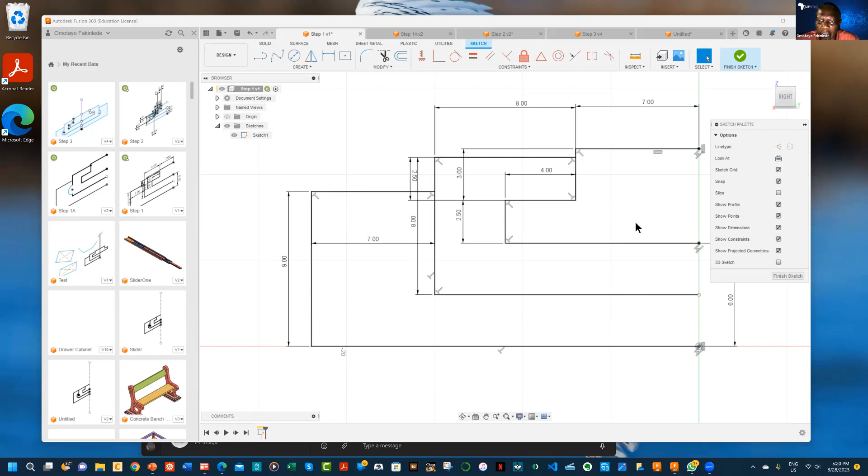This is the drawing we have from before we went on break. We have these lines here, 1, 2, 3. And then these are the 4 half sections of the 3 slides that we have.

Now, we could go on and extrude this, but it means that we have 0 tolerance between the sliding bodies, which is not practically possible. If you are going to manufacture it, they won't slide. So you have to input an amount of tolerance.

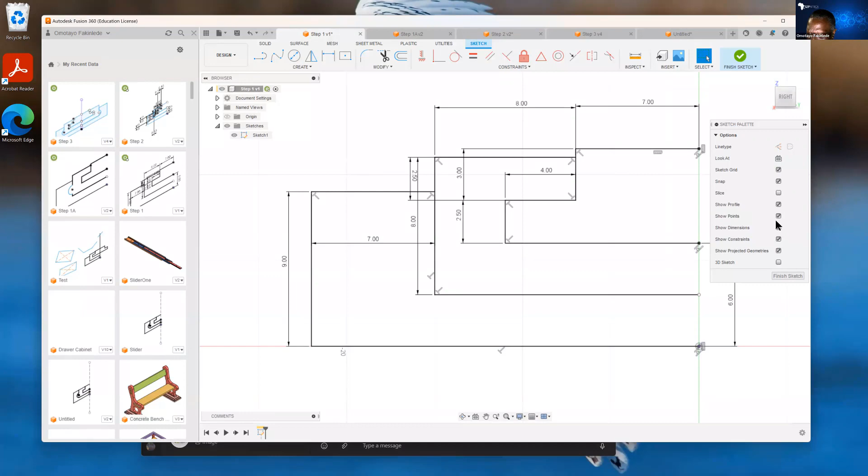To do that, what we are going to do, let me take the dimensions and the constraints off from being shown. I can do that by removing the constraints, and I'm only removing them from being shown. The dimensions are still there, but they are not explicitly seen. Okay, so this is the drawing we have.

What I'm trying to explain here is that between this middle slide and this inner slide, there should be some constraints, there should be some tolerance. Let us say a tolerance of about 0.1 of a millimeter. You can, but practice will make perfect. You will be able to see whether you should make it bigger or smaller as you actually make real objects, either by 3D printing or by actual manufacturing.

The thing to do here is to do what is called an offset. We can begin by offsetting this drawing through a distance of 0.1 of a millimeter. To do that, you go to the modify section and you choose offset, and it says select curves. This is the curve you want to offset, and the offset position is minus 0.1 of a millimeter, and that is it here.

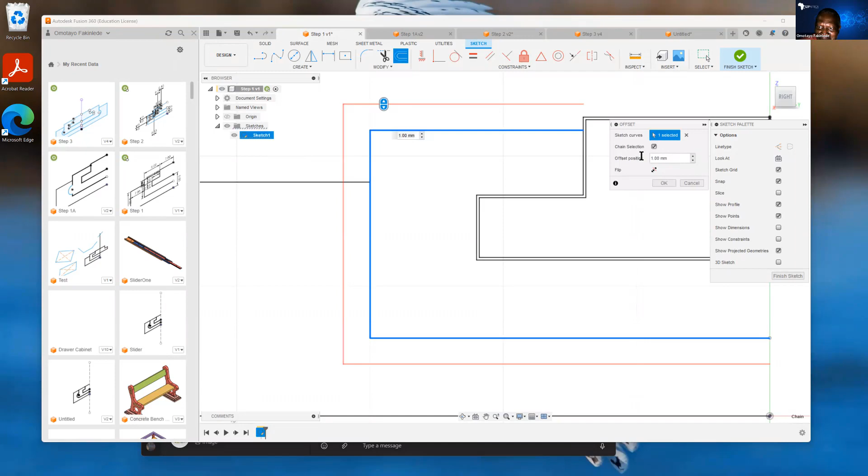So you can see, let me make it bigger so you can see what it has done. It has created the tolerance by duplicating that line. We're going to remove some of one of the lines as we go on, but at least that is something you can see here. And then if we want to do the offset again, we can talk about this one, and we can create this offset again by minus 0.1 millimeters.

If we do that, the next thing to do is to do a cutting. If we cut some of the unnecessary lines, for instance, the top part of this one is not necessary, the bottom one is enough. So I can cut this one off. I can cut this one. I can cut this one off too. So that is the cut.

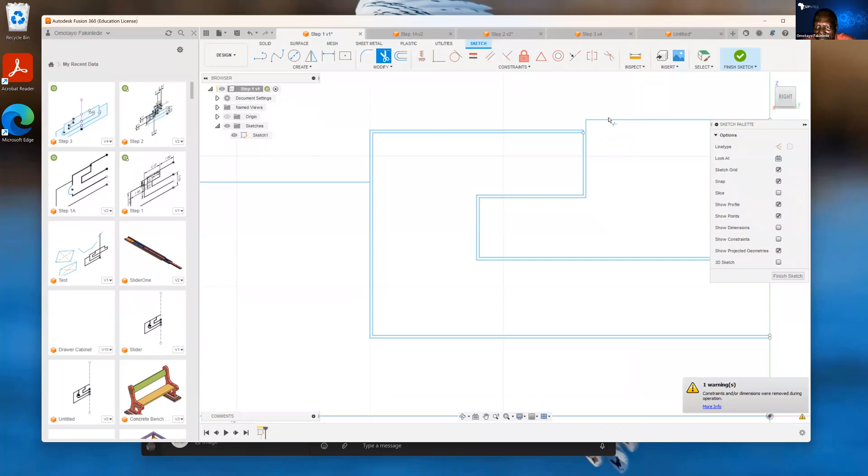I've done that cutting. And inside in the larger one, I can cut this one also off here. I can cut the top one here off. And then cut it off to this point here. So if you look carefully now, you will see that the inner one is a complete closed curve, but that complete closed curve is not touching the one that is next to it.

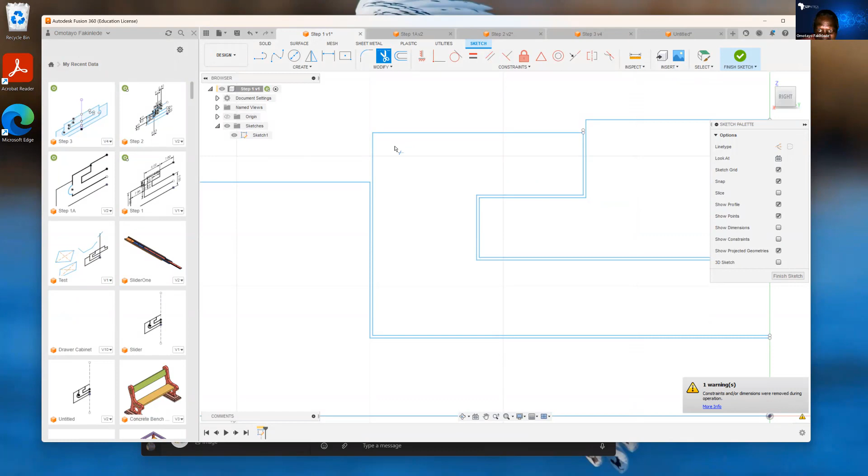Similarly, let me see whether there's a problem here. There's still a small problem here. There's a place to cut off here. So I'm cutting this one off. So if we look at it now, you will see that it is still the same drawing, but there's a slight offset between the inner and the middle slide here with a tolerance. And then similarly, the middle to the outer one, there's also a tolerance. So there is nothing touching the other.

If we do that, the next thing we're going to do is to start filleting. Filleting is to make a gentle curve instead of the sharp edges that you see in some of these joints, at these corners. And you have, to fillet, you have this filleting icon here.

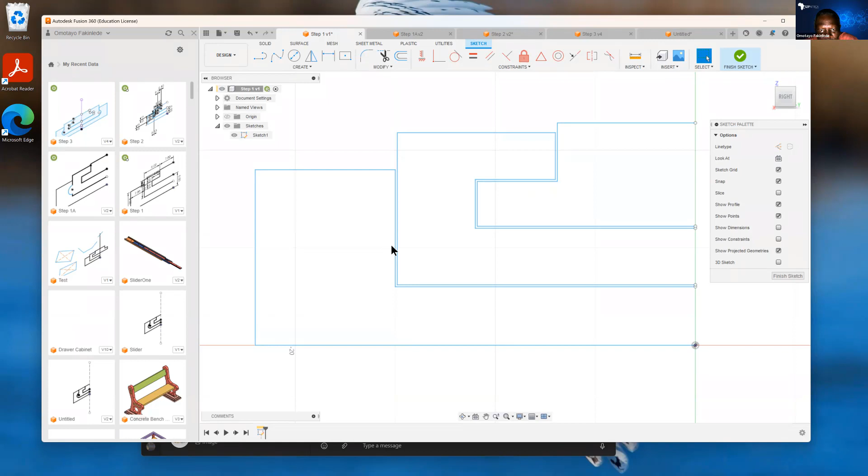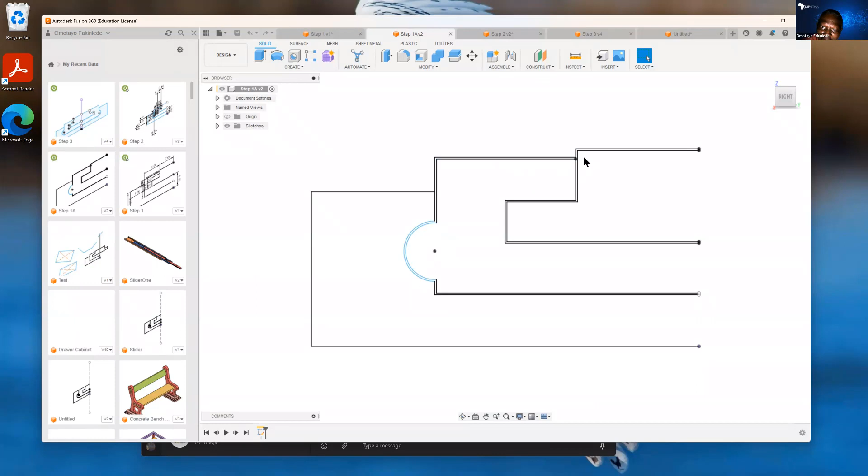So if you choose fillet there, oh sorry, before I fillet, I need to do a circle here. If I do a circle here, and I can do a circle here, that circle is supposed to create the groove. And I'm supposed to have done that circle before the offsetting. So instead of going over that, I will just show you where I've done it correctly. So if I did the circle before the offsetting, this is what I will have. I'll have a situation where the circle here is also offset with the thing, and there's a groove here.

If I do everything correctly, then I have this next drawing here. The only other thing here is that we have done the filleting around these edges. I will take an earlier curve to show you how the filleting is done. Even though that one doesn't have this offset, it will explain the filleting method.

To do the filleting here, you just take the fillet icon, click it, and then choose the two lines to fillet at the angle. If you're happy with that, it says 1.5 millimeters and 0.5 millimeters. I think that is good enough.

So if you're happy with that, take the marking menu, right click, and it says repeat fillet. You take repeat fillet and do the fillet here again, this one and this one, the same fillet. You accept that, and do another fillet for this outer one.

Okay, first use the marking menu and then fillet here and here. So that is that. There's an error in this fillet here.

Let me go back two steps to remove that error. Okay, so let me do the fillet again. Marking menu, repeat fillet, that is here. If I do the repeat fillet here too, then we can do another fillet here and a fillet here. All those fillets are the same.

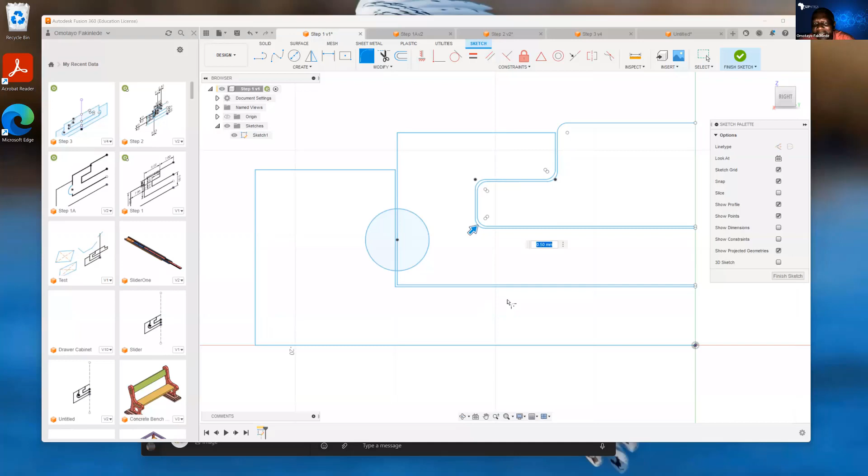So that's why, if you forget or have any difficulty, you can right click and get the marking menu, which says repeat fillet from this to this. So you can do the fillet with offsetting the circle.

By the time you finish all of that, you arrive at this drawing. This drawing here is the same drawing as before. We have done two or three enhancements. The first enhancement is that we did a groove here using a notch or a groove with the circle.

All we did is take a circle, center circle, click it here, and just select the radius. The circle with the radius gives you the circle. Then if you do the filleting here and there, everything where they are touching is smooth going. We have basically finished the drawing now.

We are now ready to do the next step before we begin to extrude, which is to create a mirror. Remember that from the beginning, what we were working with was half the drawing. Now that we've completed our work on this, we can get the whole drawing by creating a mirror image of what we have there.

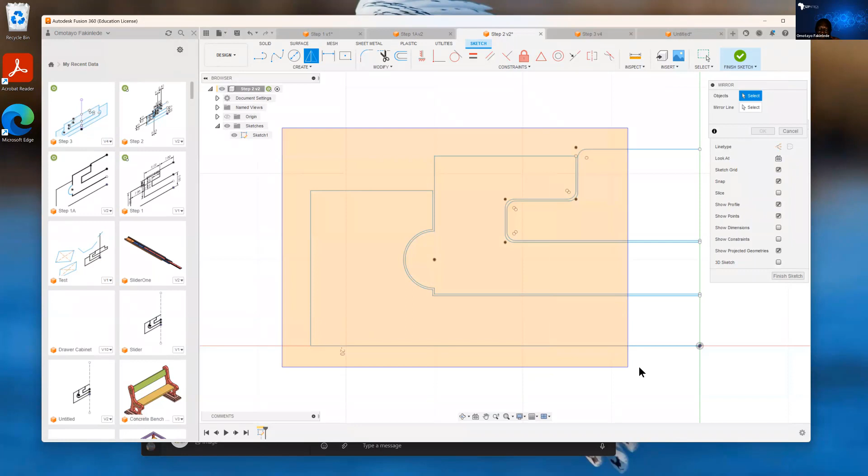There are several ways to do this, but one easy way is to just use a fence. If you start with a fence that carries all the things you have done before, it selects everything that is there. It says 74 elements selected. You may wonder, did you do up to 74 elements? Well, all your lines, fillets, and constraints add up to 74.

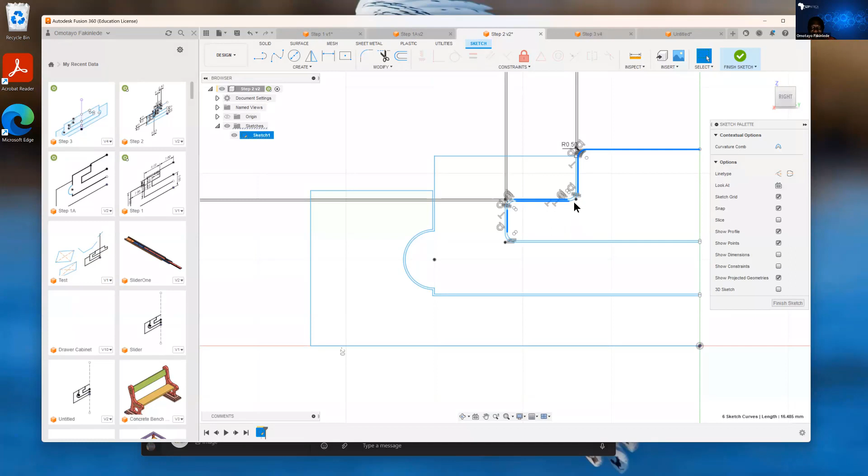You could also pick them one by one. For instance, if I take that off, I can pick this line, then this line, then this line. Maybe I should hold down my shift key. I can pick them one by one, but it's not as efficient as picking them using the fence.

So let me take that off and go back to the mirror dialog. It says select objects to be mirrored. So I take a fence and select all the objects I want to mirror, 74 of them. Then I click the next dialog, which is the mirror line.

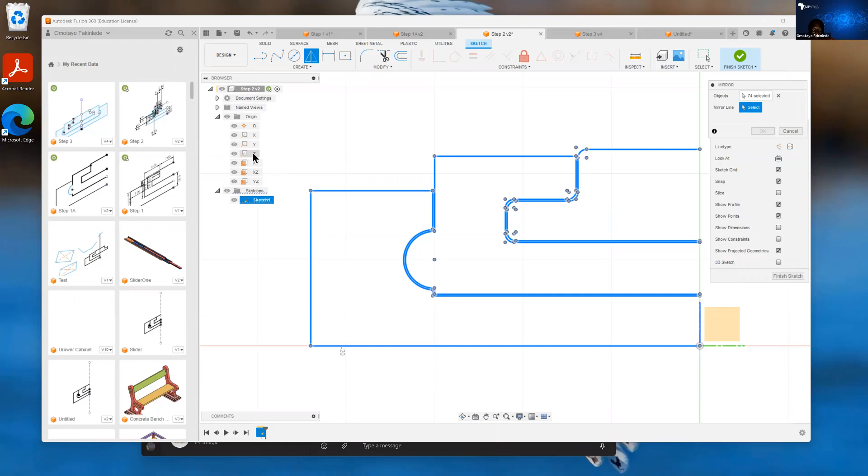There is no line horizontal here where I want to mirror it. I have two choices: I can either draw a line here to use for mirroring, or go back to the browser. If I go back to the browser and make the origin active, I can choose the Z-axis as my mirror line. So if I choose the Z-axis, you see the mirror line has been selected.

So you see what has happened now. With the mirror line selected, I can press OK. When I press OK, the entire object has been fully mirrored. So let us see the whole thing in full.

So let me take this sketch palette off so you can see the whole thing. Even though we worked only on one side, the mirroring has created the full picture on both sides, so we have a mirror image now. This is the section for the inner slide, the middle slide, and the outer slide.

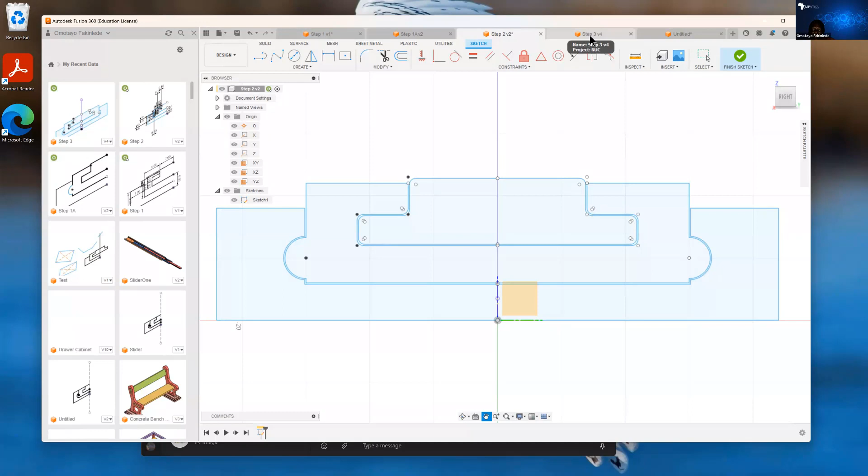We can do many things now from here. Let's see, I can put it in plan view, and then create solid objects. Before we do what we really want, let's say we want to create solids of revolution from here. Let me create solids of revolution and see what it looks like.

I say create, finish sketch, and now I want to create a revolve. It asks me to choose the profile to revolve. If I choose this profile, the next thing is to choose the axis of revolution. Again, the Z-axis is the axis of revolution, so let me go there and choose the axis.

Immediately you can see the revolved cross-section of the inner one. Let's say I create a component from that - I create a new component, and that's a component there. I can come back again, turn on the sketch, and create another revolve.

I create another revolve. Let's say I create the revolve based on a profile - this is a profile. Then I want to create a new component, and select the axis of revolution, which is Z.

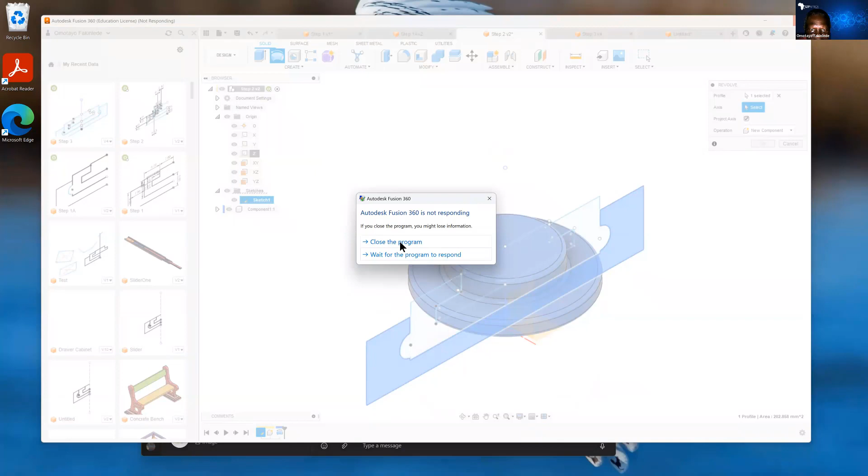Okay, the Fusion 360 is not responding. Yeah, I don't know why. My Fusion 360 seems to have frozen here. That's okay, it's come back.

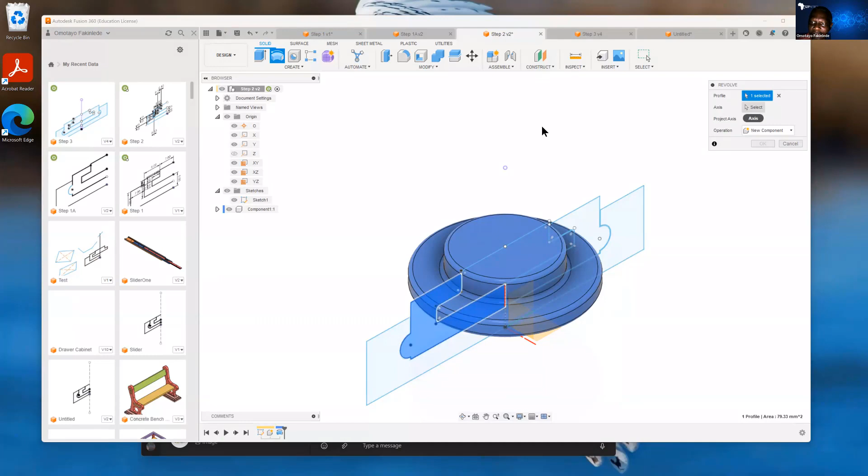Okay, let me do another one. If I create a revolve, let me select another object here. If I create a revolve on this, remove this one, and select the axis of revolution, which is the Z-axis, it has done this revolve around that as a new component. So that's another component, and now you may not see that tooth because this one is almost completely covering it.

Let me create the third object and see if we can. Let me try the third revolve now - create revolve, select the profile, the axis, and the angle. I want the angle to be 180, and I want a new component.

Let's see. It's okay, it's not... this is not, it's not - it's complaining there's an error. So let us take this back.

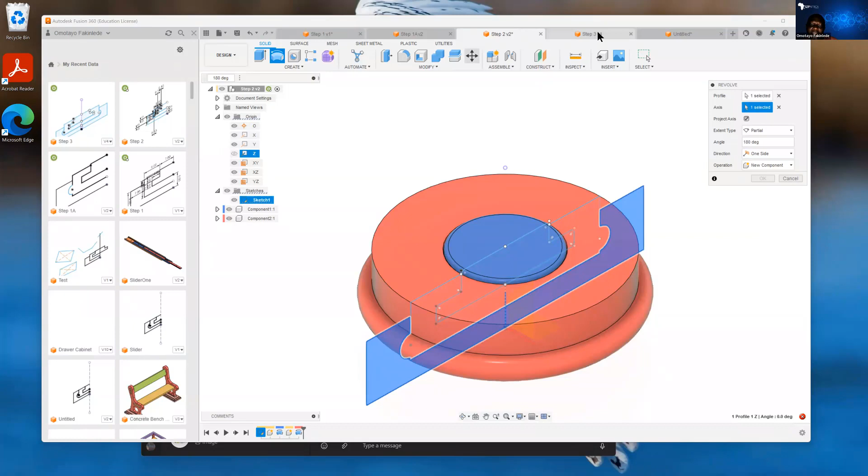Instead, you can see that we can create revolutions from it, but that's not what we're interested in. We wanted to extrude - let's say we extrude this.

Let me take this one that was difficult to revolve, and create an extrusion instead. I select the profile, and I want the extrusion to start on the profile plane. This is the extrude dialog, and I want it to be symmetrical to both sides, so it moves on both sides, and I want to create a component with it.

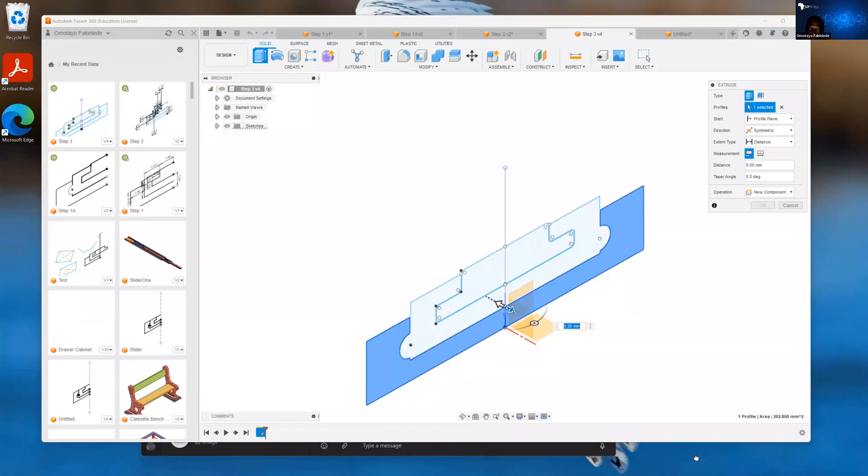Let's say I make it 200 mm - no, let's say 150 mm. That is it. So that's the outer, the outermost part, and it now exists as a component.

If I want to look at the sketch again, I open it and create another extrusion. This time let me choose the inner section, and I want it extruded on both sides symmetrically, with a distance of 150 millimeters. You can see the second part, and I want it to be a new component.

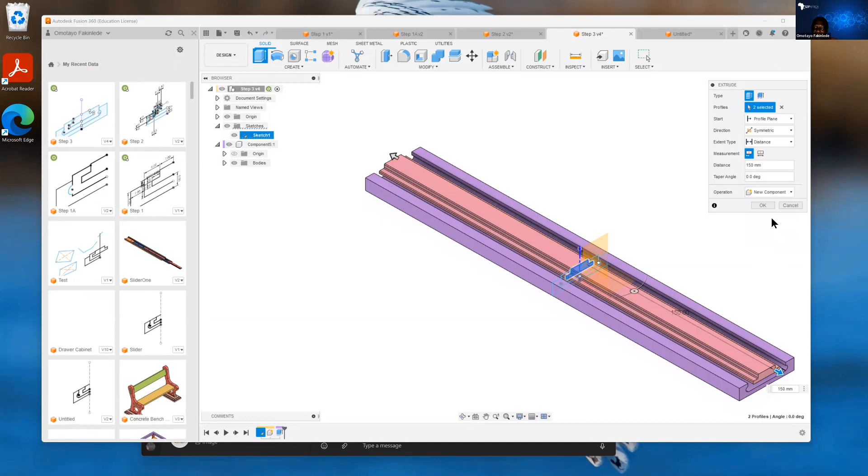Okay, let's take a look. I have created two extrusions. I've created the innermost and the outermost, leaving out the middle one. So this is it now. Let me now create the middle one.

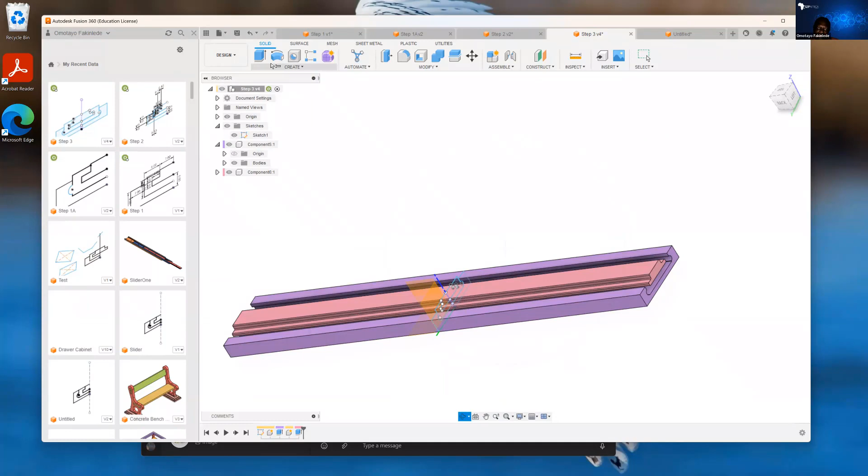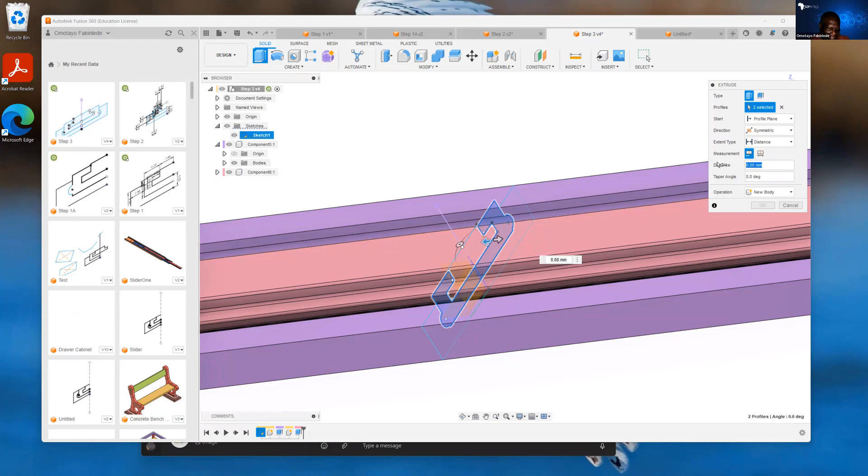I can create the middle one by extruding again. Let me choose the middle part, this middle part, and create my extrusion. I want it to be symmetrical again, as before, and make it 150 millimeters on both sides. So you see, okay, not new body, but new component.

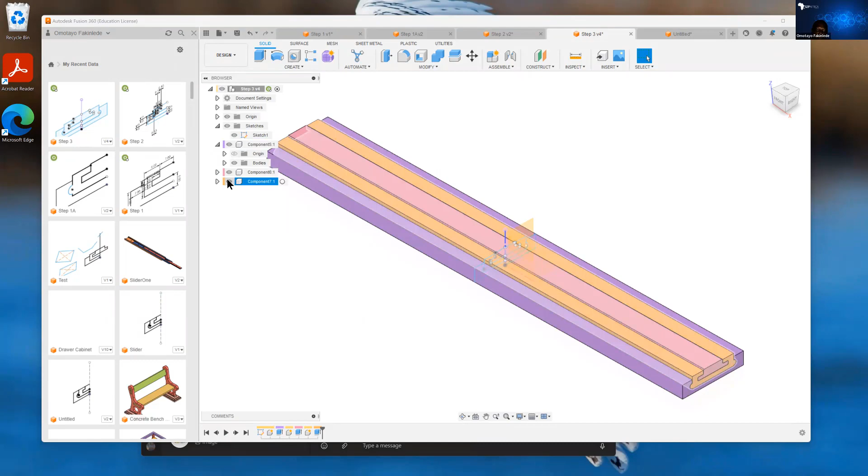So let's go home. You can see the three parts of the base slider have been created. You are able to switch off components so you have only one showing. So if you want to see the outermost component alone, that's it. If you want to see the innermost alone, that's it. If you want to see the middle component alone, with its groove and everything, that's it. So all these things are just coming from the simple drawing we have.

Let us see how much time we have left and see what we can still do. I want to go back to the slides now and discuss. If you have questions, please don't hesitate. If there are things that confuse you that you want me to go over, let me know by asking a question in the chat room. So let us go back to the slides.

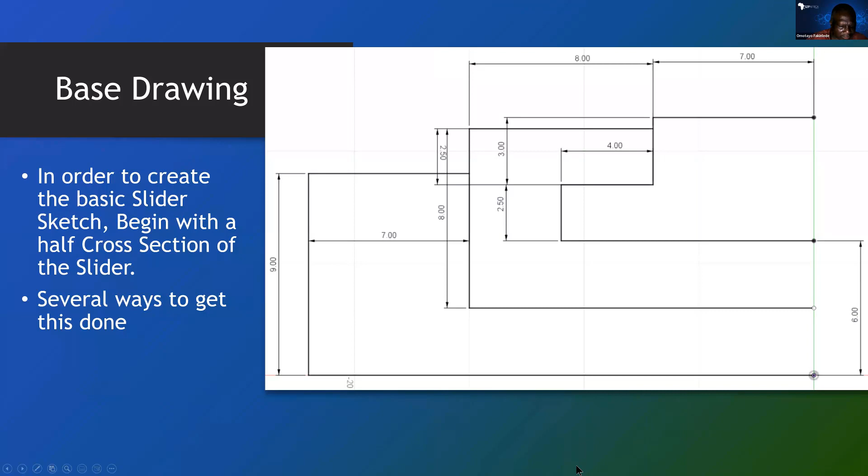There is a question from Olarinde Ali: when you want to revolve a component, how do you choose the axis of rotation? How do you choose an axis of revolution when you want to revolve? If that is the case, I want to go back because of Olarinde Ali's question, and let us do the revolve again. To do revolve, let me go back to the Fusion 360 page.

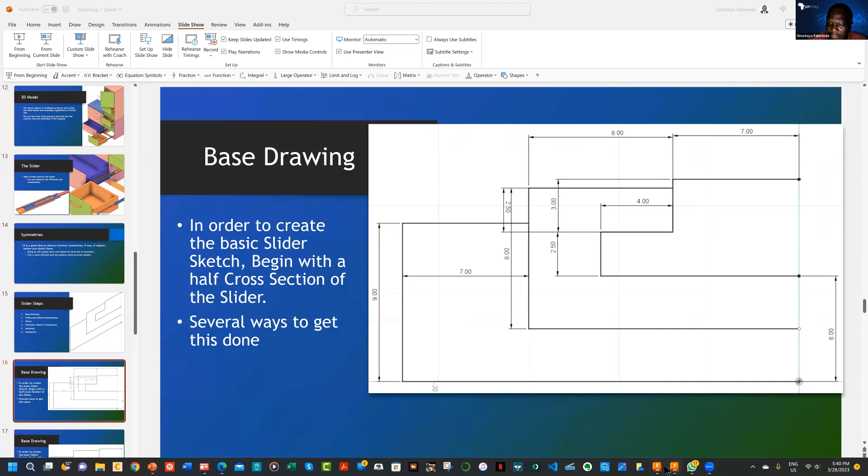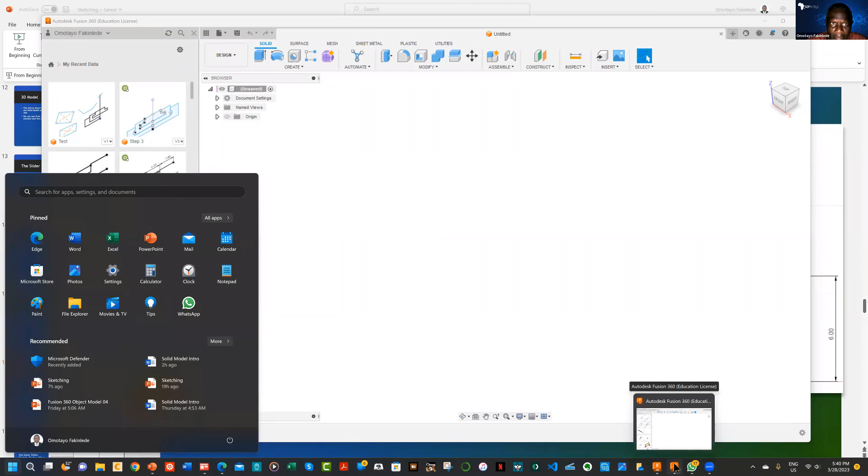Let us take something that has... I'm trying to go back to an example of Fusion 360. Let us take this step 3 diagram here. It's loading.

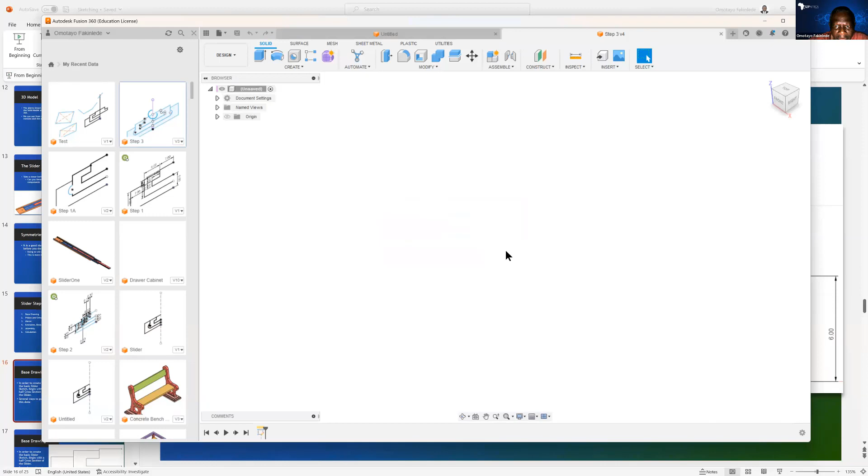Okay, so suppose I want to extrude this. If I want to revolve this, the easiest thing for me to do, since the Z axis is the axis that I want to use, I can create revolve, and since I already chose the profile, it knows what profile has been selected, then you choose axis. You can go to the origin and select the Z axis, because the Z axis is where I want to revolve through here. And that's it.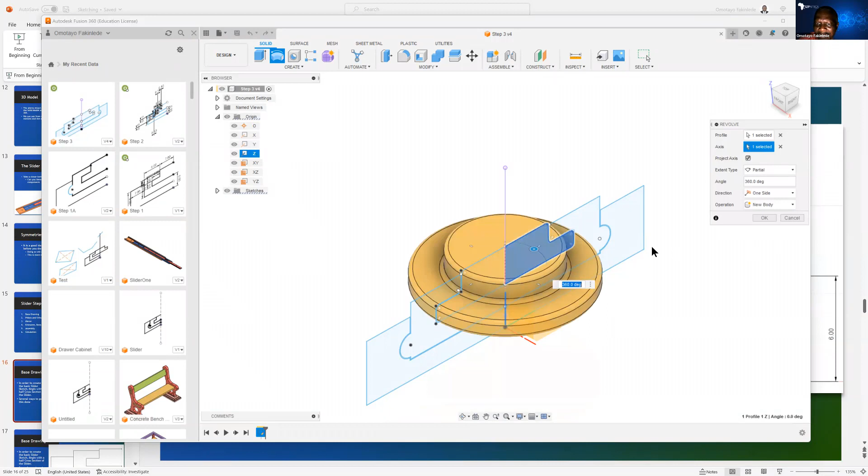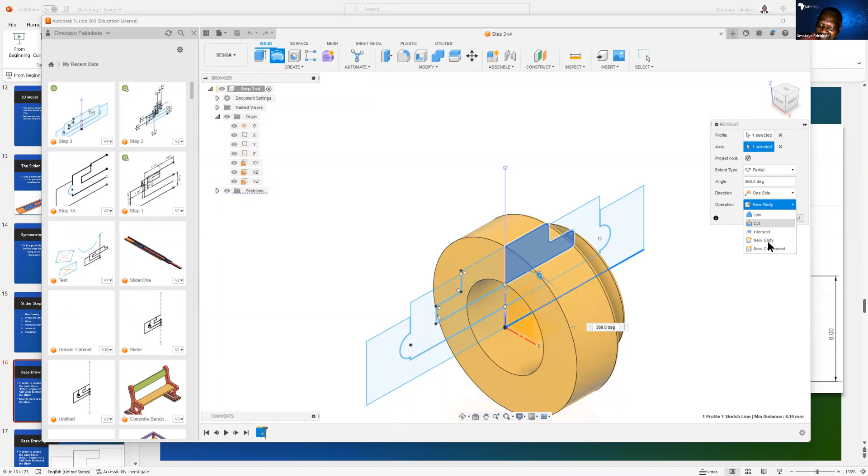But if I make a mistake and choose the wrong axis, let's say I choose the Y axis, this may not be what I intend, but this is another revolve. Let's see how this one looks like. Let's also say it's a new component. It depends on what I want to create. This can create, depends on what, if this is what I want, then that's okay.

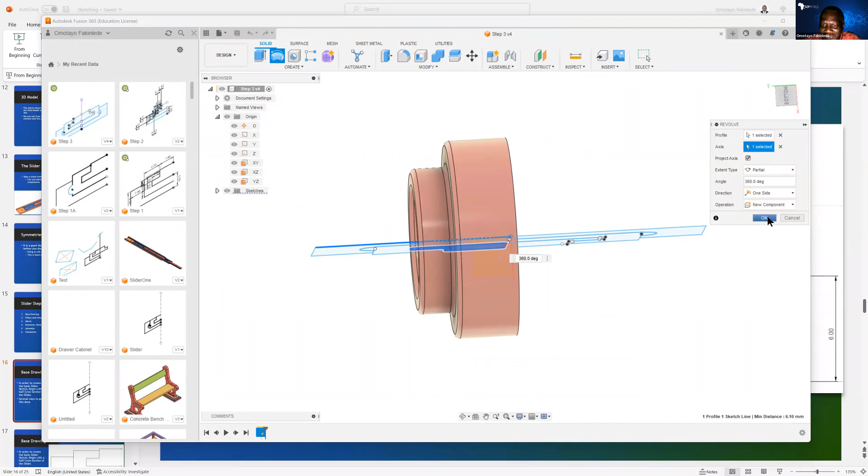Or as somebody said, you could also revolve along a created line. You can create a line for that. So I'll cancel this and then go back home. So I hope I've answered the question. Let's see.

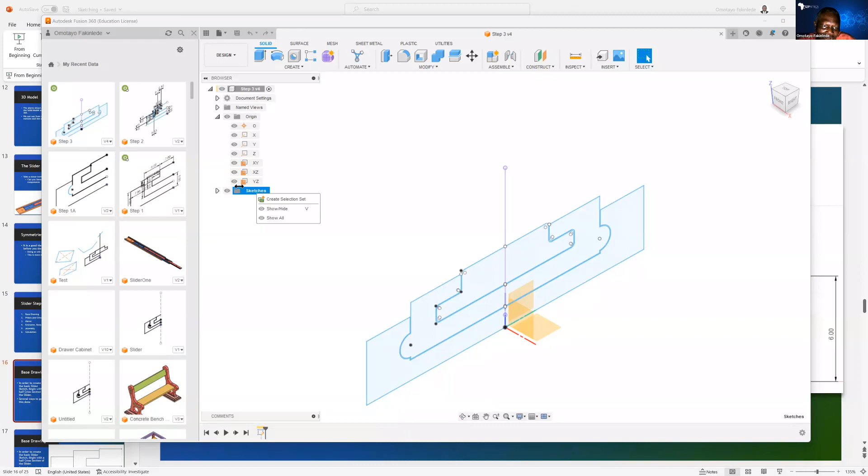If you can modify this sketch again, say edit. If you want to edit the sketch, there are things you can do on an edited sketch. If you want to create a line, you can go here and trace a line from the origin and let the line be very long. That's the line, and you can make sure that line is vertical.

So that line is vertical. Now, if you want to make it a construction line, what do you do? You can just select the line when it has a thick blue outline and press X. If you press X, you see the line turns into dashed lines. That is a line for construction. It's not part of your drawing, but you can use it to help you in your drawing. So that is one way.

If you can take that off, another way to create a construction line is to go to the sketch palette. If you go to the sketch palette and see line type, you can choose construction as the line type you want to draw. If you choose that as the line type, any line you draw now is automatically a construction line.

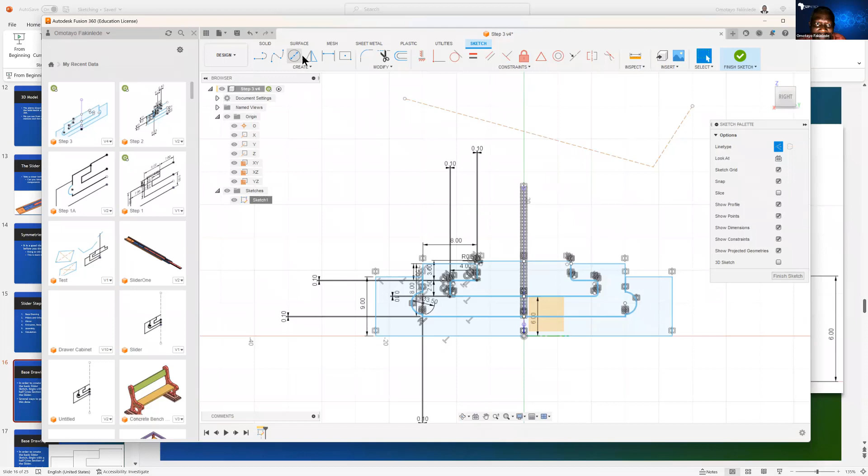Even if you draw a circle now, it's a construction circle. If you draw a spline, it's a construction spline. Anything you do when you have chosen the line type to be construction, there are two easy ways to make sure you draw construction lines: by choosing the line type, or by marking the line and pressing X. Those are the two ways you can choose your construction line.

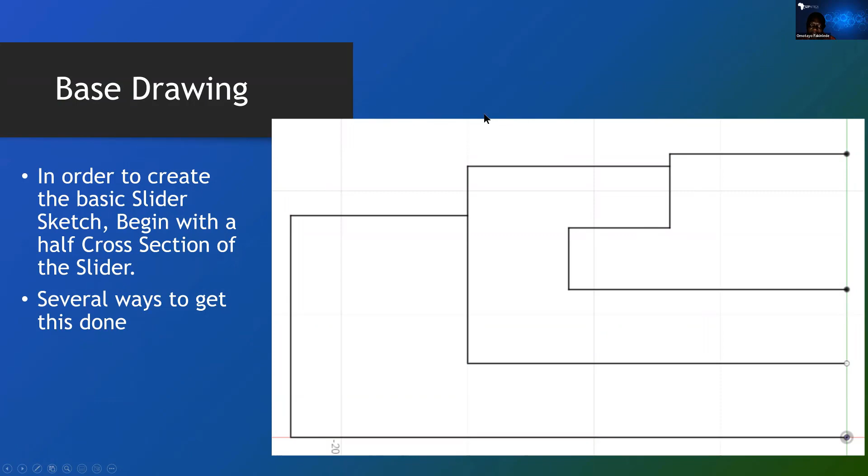So I think we can go back to the slideshow now. If you can see my slide here, let's just go through what we did before. We started with the base drawing. After drawing the base drawing, the next thing we did was use the offset mechanism after we did a circle and the cutting of the circle.

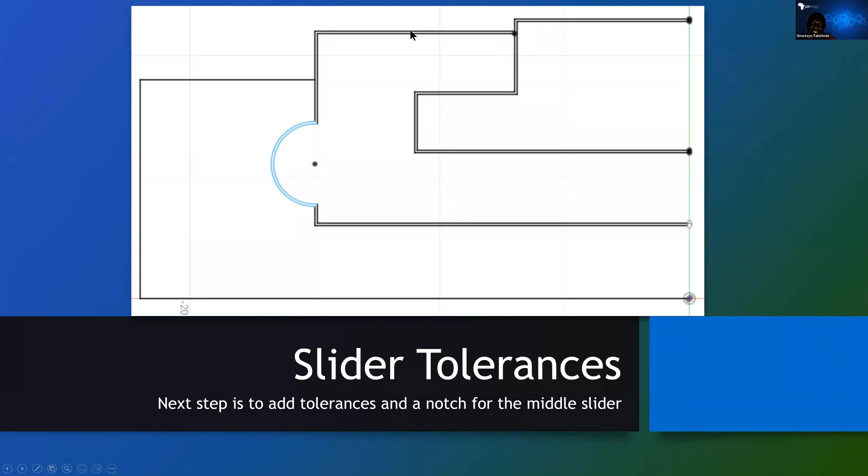Then everything is offset equally, and by the time you cut unnecessary lines, after filleting, you get this kind of drawing. It is this type of drawing that you can now either extrude or revolve or do whatever you like with it. So this is what you need to do your extrusion. With this one now, what else do you need?

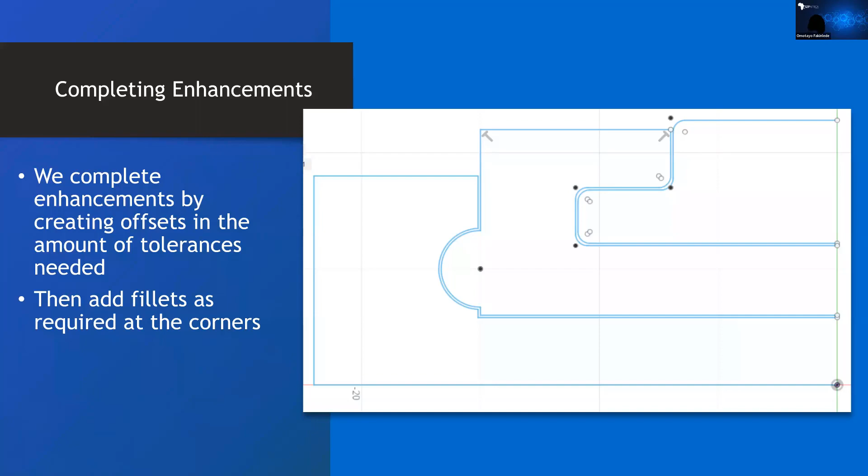We've talked about the mirror dialog, the two main components: objects to be mirrored. You have to choose which object to be mirrored, and then you can select one by one or by fencing. I've shown you how to do the fencing - you just hold down your mouse button until you draw a rectangle around it, and everything fully contained within that rectangle is selected. If you want to be more discriminating, you can select one by one, making things big so you can use the point of your arrow with your cursor to select them.

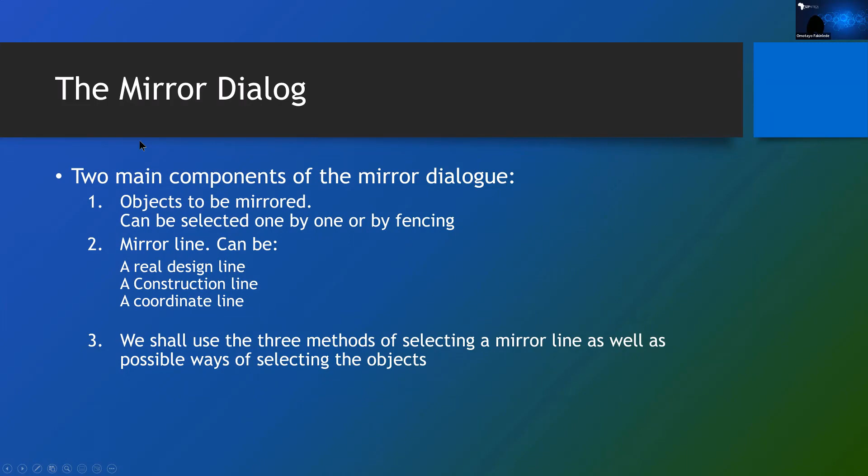The mirror line can be a real design line, a construction line, or a coordinate line, like the x-axis, y-axis, or z-axis. We shall use three methods of selecting the mirror line as well as possible ways of selecting objects. We've already done some of that. So after mirroring, we get this kind of drawing - you remember this type of thing. This is what we can now extrude to get our slider.

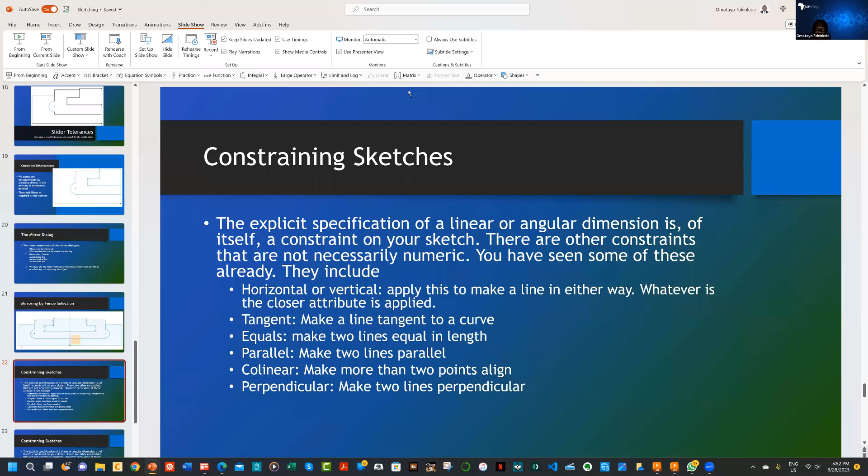If you have extruded these pieces—I can't find the drawing again—if you have extruded the pieces, there is nothing constraining them to move in any particular way. You can pick the inner one and move it up, and pick the lower one and move it down. They will just move as they like.

What a joint does is enforce the correct kind of motion that you want on your components, so that they cannot move in any other way. So the joint is part of the assembly process to constrain the kind of motions that are possible, or even show that some motions are not possible. For instance, if you have a bench, you do not want the back side of the bench to move, so that one will not be moving at all.

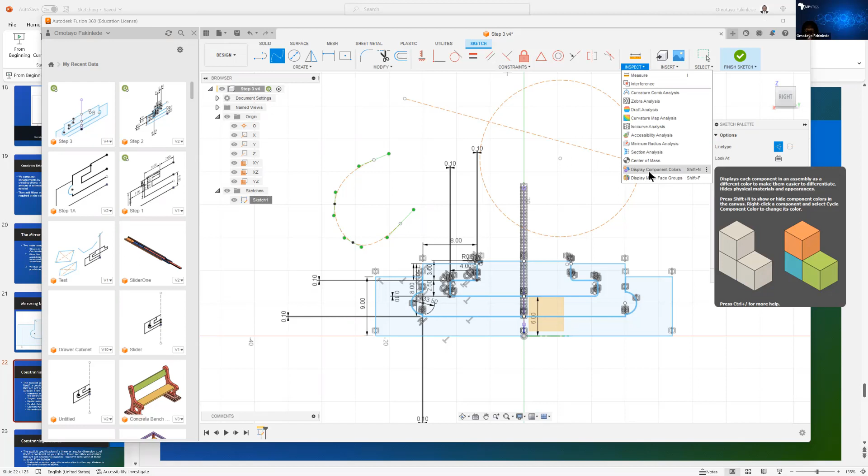I noticed that when you create a new component, it comes with a new color, but mine doesn't. The reason yours is not doing that is you need to go back to inspect and say display color—that's second to the last. Under inspect, in the toolbar towards your right, there is inspect, and you say display component colors. You can toggle that, either display component colors or not displaying them. So just go back there, click it to display your components in color going forward.

I mean the one you used in last class. I don't know what you're talking about. You can add color—it's a feature. No, you can add color, but there is a natural color that will come with it if you just display the colors. But there are so many things in it. You can decide to say, okay, this is a piece of wood, this is made of cement, this is made of iron, and it will put the color of iron there. So it will display—you can actually select what material your body is made of.

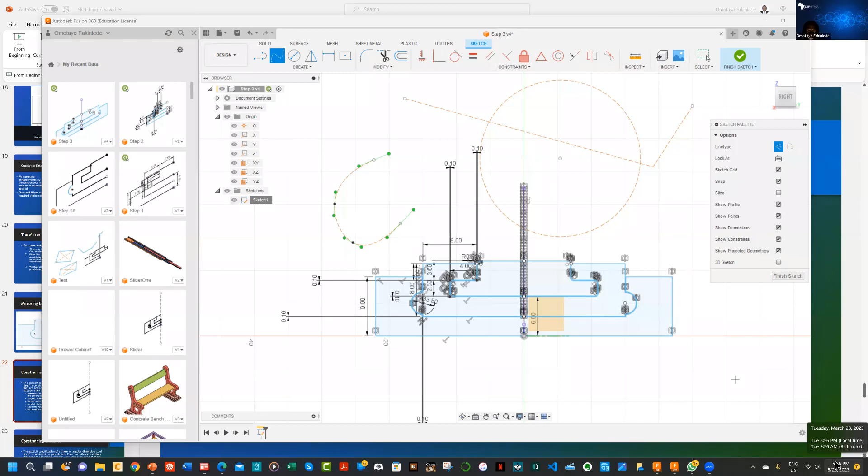Okay class, thanks for your attention, and we'll see you again next week. But between now and then, please make sure you practice what we have done today, because I will talk more about theory, but only after you have gained basic skills. Because if you have basic skills, you are not just cramming the theory—you are practicing with it, and you will never forget. But if you are just cramming the thing and not doing anything, then you are not really helping yourself. So make sure you do this, create this, and then you can also try it with a slider that is different from the one I've used here. Thank you.